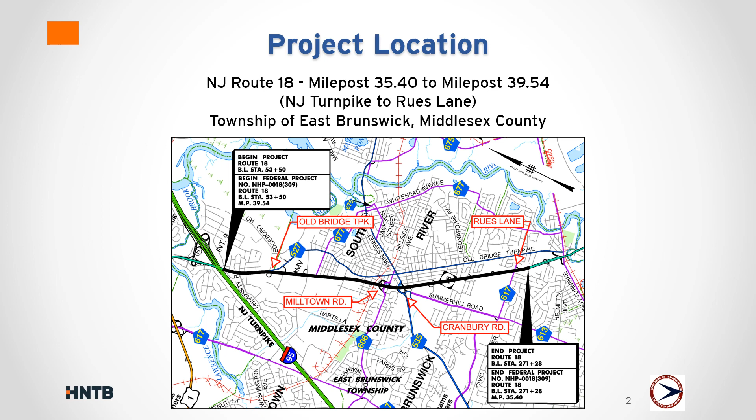This drainage and pavement project is located in the township of East Brunswick in Middlesex County, New Jersey. The project is approximately 4 miles long along Route 18. The northern limit is at the southern end of the Route 18 bridge over the New Jersey Turnpike, and the southern limit is just south of Rues Lane. In addition to Rues Lane, there are other major intersections and interchanges with county roads at Old Bridge Turnpike, Milltown Road, and Cranbury Road.

This project was initiated from being ranked highly on the NJDOT Pavement Management System and Drainage Management System lists. The purpose of this project is to provide pavement rehabilitation along Route 18 from milepost 35.40 to 39.54. Drainage improvements will be constructed to alleviate existing drainage deficiencies and flooding conditions.

Operational and safety improvements will be implemented to enhance vehicular and pedestrian safety and reduce congestion along Route 18 at Edgeboro Road and Tices Lane. Sidewalk and curb ramps, curb, guide rail, sidewalk connectivity, and traffic signal deficiencies will also be addressed.

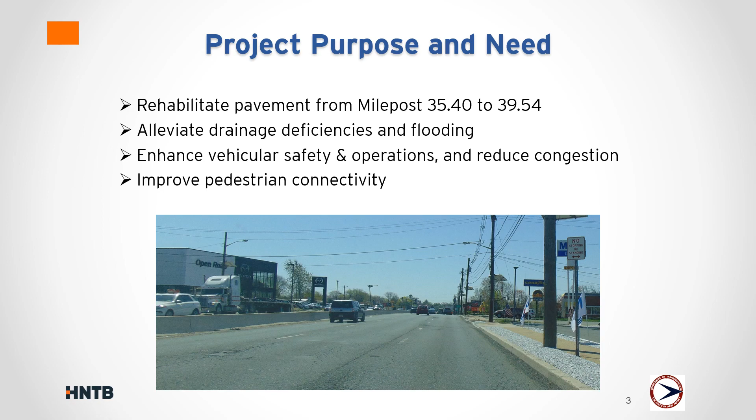Within project limits, Route 18 is a divided highway urban principal arterial with a 50 mph design speed and a 45 mph posted speed limit. The original shoulders were previously converted to a third lane in each direction, resulting in 3 lanes in each direction, but with no shoulders for shifting traffic during construction.

There are intermittent sidewalks along Route 18, but some segments are missing and some ramps do not comply with current standards. There are 8 existing signalized intersections that will be upgraded as part of the project and a 9th signalized intersection at Eggers Street and South Woodland Avenue that is in project limits but will not be affected.

East Brunswick is a commercially developed area with many access points along Route 18 and over 200 total driveways. Access to all properties will be maintained throughout construction, with all driveways remaining open during business hours.

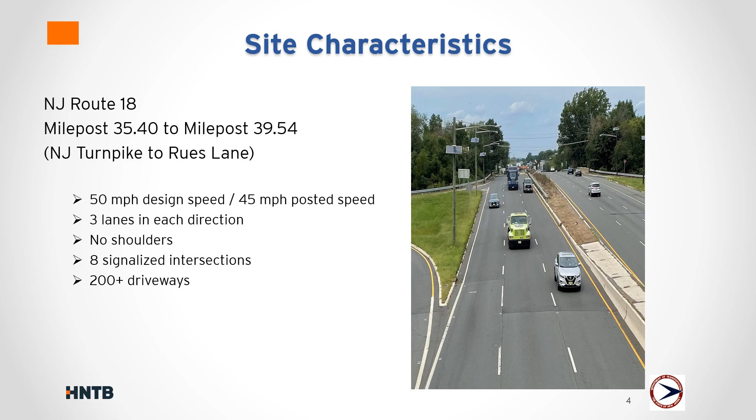The following 5 slides will show an overview of the proposed corridor improvements. The first slide starts at the north end of the project by the New Jersey Turnpike, progressing southward to Rues Lane and the south end of the project in the 5th slide. On each of the slides, you will see the roadway detailed in yellow and orange with blue boxes.

The yellow area represents the part of the roadway where pavement will be milled and resurfaced. The orange area represents the part of the roadway where the entire roadway will be replaced with new full-depth pavement. The blue boxes show each of the Route 18 traffic signals within the project limits.

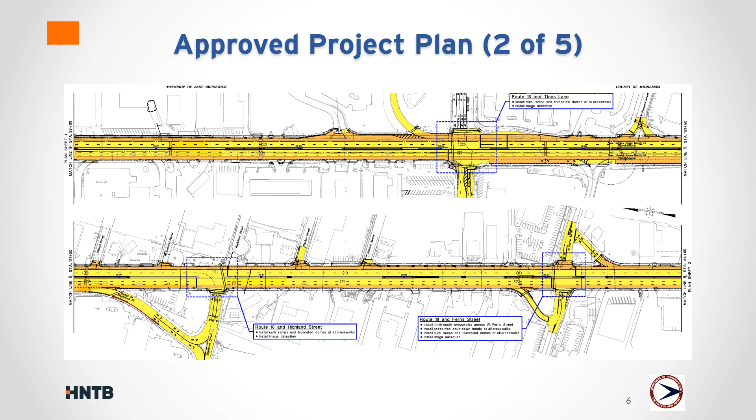On this next slide, you can see 3 blue boxes. These are at Tices Lane, Highland Street, and Ferris Street. There will be improvements to all 3 of these existing signals.

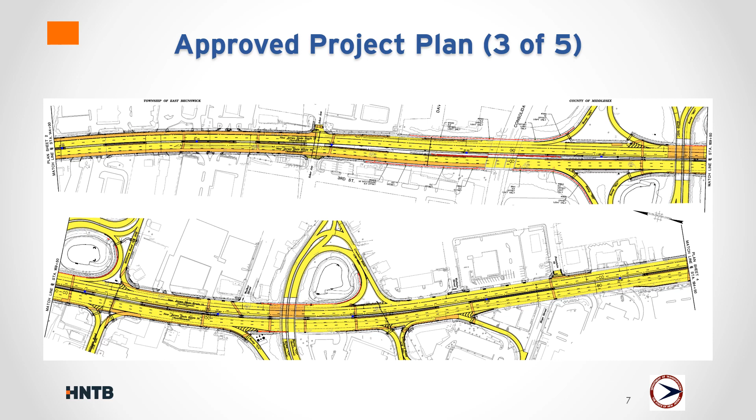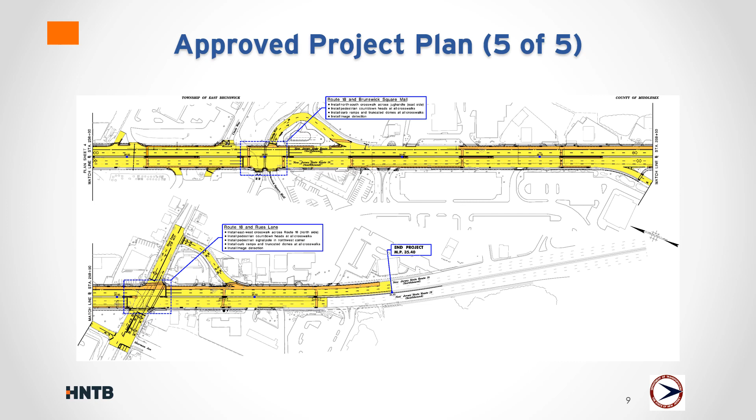Specific to roadway and traffic, the corridor improvements will include pavement, sidewalks, driveways, traffic signals, and related items. The right lane in each direction of Route 18, formerly a shoulder, will be reconstructed to provide proper pavement depth, cross-slope, and drainage improvements that will be discussed further on the next slide. The entire roadway will be milled and resurfaced along with intersecting streets, jug handles, and ramps. Guide rail will be upgraded to current NJDOT and federal MASH standards. Bus pullouts will be upgraded as shown here.

Missing sections of sidewalk will be completed to provide continuous sidewalk throughout the corridor, and all sidewalk and curb ramps will be designed to meet ADA compliance. Where feasible, driveways and parking will be adjusted or modified to provide the appropriate driveway width and spacing to meet the New Jersey State Highway Access Management Code, along with an ADA compliant sidewalk crossing.

Finally, new 12-inch signals will be provided to meet current NJDOT standards. These will be at the 8 intersections previously identified, starting at Old Bridge Turnpike and Edgeboro Road in the north, as shown here, and onward south to Rues Lane. All of these signals will be linked to the state's Adaptive Traffic Signal Network by ITS connectivity through the NJDOT fiber optic network. The state centrally monitors these signals and can adjust timings as needed to provide the best possible traffic operations, especially during periods of traffic congestion.

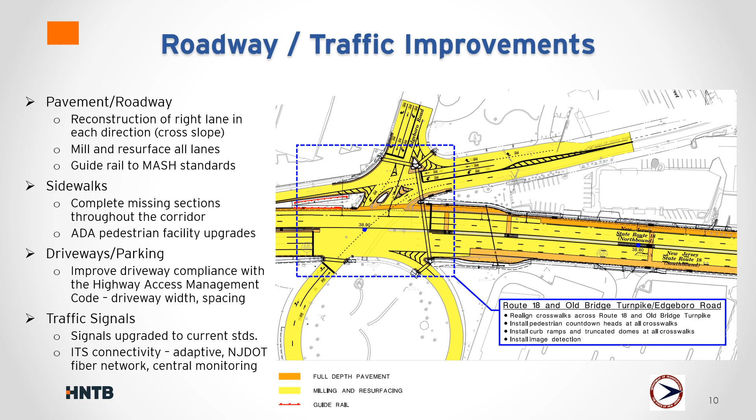The existing drainage system mainly consists of corrugated metal pipes. Corrugated metal pipes running longitudinally along the roadway will be removed and replaced with reinforced concrete pipes meeting current NJDOT standards, while lateral or transverse pipes crossing Route 18 will be filled and abandoned with a new reinforced concrete pipe placed next to the existing corrugated metal pipe. In addition to the pipe replacements, the project includes the installation and reconstruction of drainage inlets and manholes to improve gutter spreads and hydraulic grade lines, which will reduce flooding concerns along the highway.

In accordance with New Jersey Department of Environmental Protection requirements and the permits issued for this project, stormwater management treatment will be constructed as part of the project. The stormwater management design includes the construction of 2 new bioretention basins, reconstruction of 2 existing wet ponds, rehabilitation of an existing detention basin, and the installation of 3 water quality chambers.

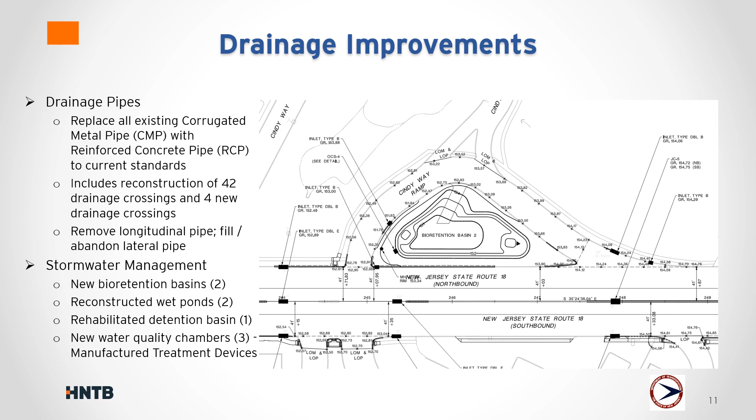The project received all the required NJDEP land resource protection permits in December of 2021. The permits included a flood hazard area individual permit, freshwater wetlands general permit number 11, water quality certificate, and a 5G3 construction stormwater permit. These permits authorize work in regulated areas such as freshwater wetlands, floodplains, and riparian zones.

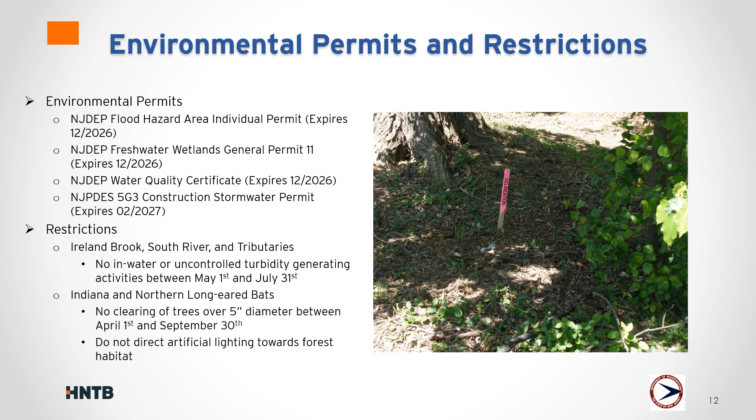The project has incorporated all the NJDEP's permit conditions into the contract plans and specifications. The permit conditions include restrictions on when and how work can be performed in and around environmentally sensitive areas, such as limiting turbidity generating activities near waterways and restricting when trees can be cleared to avoid impacts to threatened and endangered species.

Construction of some of the new drainage facilities, traffic signals, pavement upgrades, and other project elements will cause conflicts with existing aerial and underground utility facilities. Therefore, the project includes utility relocation work that will be performed by the state's contractor and various utility owners. Approximately 9 utility poles and the electric and telecommunications cables on them need to be relocated. Portions of an existing 24-inch gas main will need to be relocated to allow for new drainage construction. 6 new gas main segments totaling over 11,000 feet will be constructed.

Due to the advanced age and significant number of drainage conflicts with the existing water distribution system, most of the water mains within the project limits will be replaced, including all connections and services totaling over 24,000 feet. Also, due to new drainage installations, it will be necessary to relocate about 2,400 feet of existing Verizon duct banks.

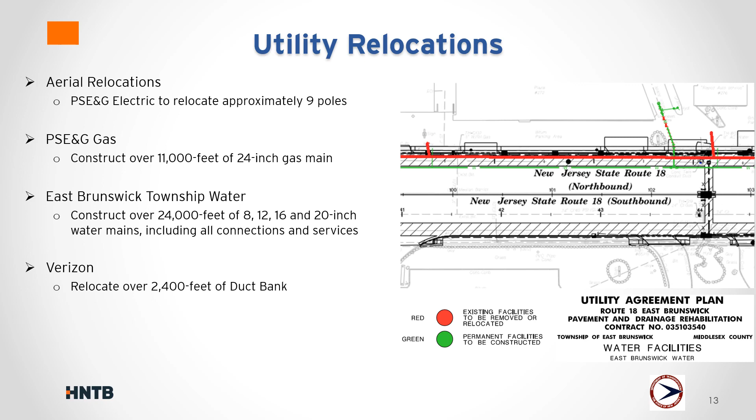The construction contract was awarded to Earl Asphalt Company in June 2022. Construction is scheduled to begin in September 2022 and will have an approximate 4-year construction duration. Substantial completion of construction is anticipated in summer 2026 with an anticipated final completion date in fall 2026.

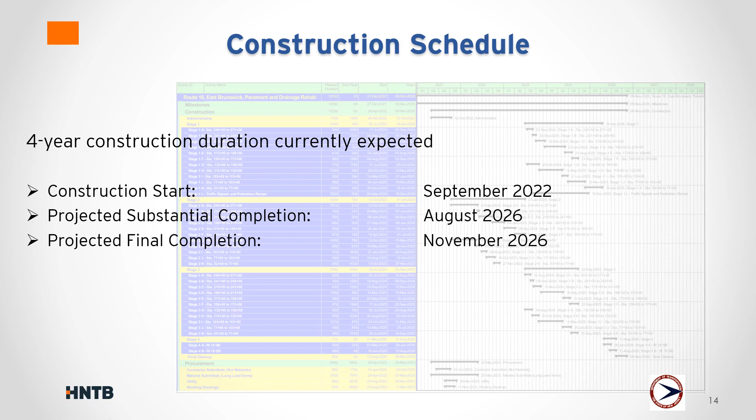The project staging is divided into 4 major stages in the traffic control plans as depicted on this slide and as further detailed in the slides to follow. Stage 2 center median work may begin ahead of stages 1 and 3 to avoid project delays while the required right-of-way is being obtained for property access along the southbound and northbound right lanes. Stage 1 northbound and Stage 3 southbound construction may be performed concurrently once access to the required properties is available.

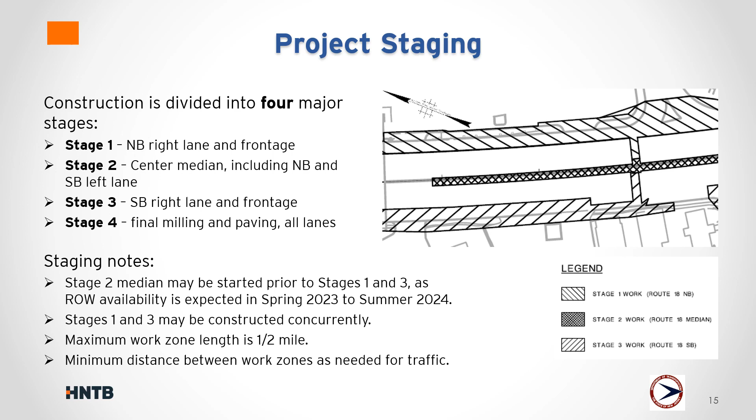To meet NJDOT maintenance of traffic standards, the maximum continuous work zone length will be 1/2 mile, with the associated lane closure only allowed to pass through one signalized intersection at a time. The distance between the successive work zones will be based on the necessary signs and sign spacing to help motorists navigate the corridor. The contractor may construct in multiple work zones simultaneously in each direction of Route 18, provided that each work zone meets these above criteria.

Stage 1 work will perform construction within the northbound right lane and along the roadway frontage using long-term lane closures behind traffic drums. Drums will be used for lane closures instead of construction barrier to help maintain driveway access within the work zones. During Stage 1, there will be longitudinal drainage and utility improvements, including installation of a new 12-inch water main along with underground lateral drainage crossings and utility connections. Pavement, curb, sidewalk, driveway, traffic signal, and guide rail improvements will also be constructed within the Stage 1 work areas.

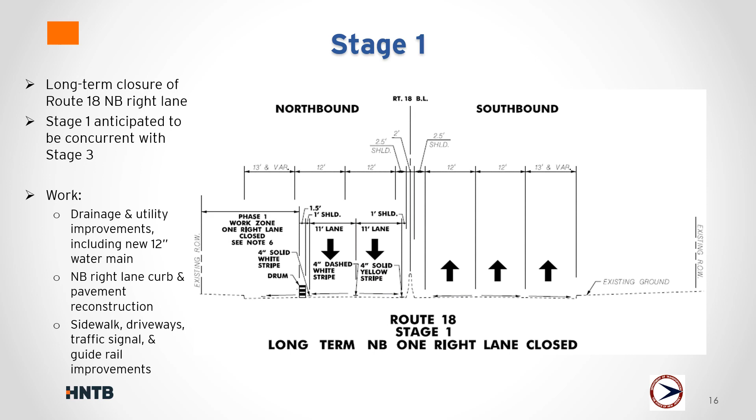Stage 2 work will perform construction within the Route 18 center median and the adjacent left lanes in each direction of traffic using long-term lane closures behind temporary concrete construction barrier. Construction barrier will be used to maximize work zone protection between opposing directions of traffic, with openings only at signalized intersections for cross-street traffic.

During Stage 2, there will be longitudinal drainage and utility improvements, including installation of a new 24-inch gas main replacing sections of the existing gas main, along with underground lateral drainage crossings. Pavement, curb, concrete barrier, and guide rail improvements will also be constructed in this area.

In order to construct the 6 segments of the new 24-inch gas main, up to 12 weekend-long closures of both the left and center southbound lanes will be needed to perform the tie-in work to the existing portions of the gas main to remain, with each closure accomplishing the tie-in at one end of each of the 6 segments. This traffic impact will be discussed further in this presentation.

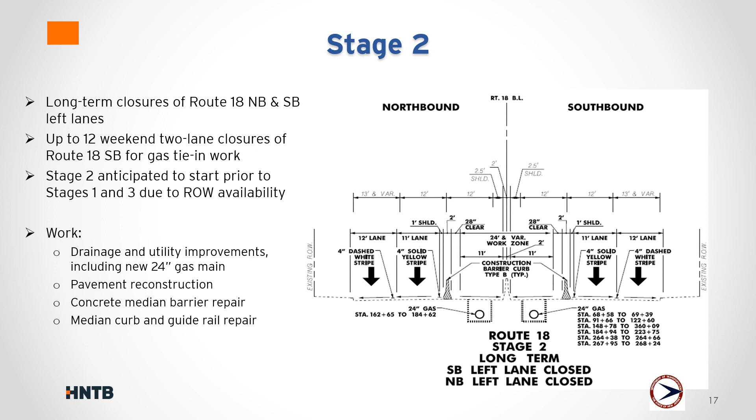Similar to Stage 1 work, Stage 3 will perform construction within the southbound right lane and along the roadway frontage using long-term lane closures behind traffic drums and not barrier. During Stage 3, there will be longitudinal drainage and utility improvements, including ITS conduit replacement along with underground lateral drainage crossings and utility connections. Pavement, curb, sidewalk, driveway, traffic signal, and guide rail improvements will also be constructed in this area. As noted previously, Stage 3 construction may be performed concurrently with Stage 1 since they occupy opposing sides of Route 18.

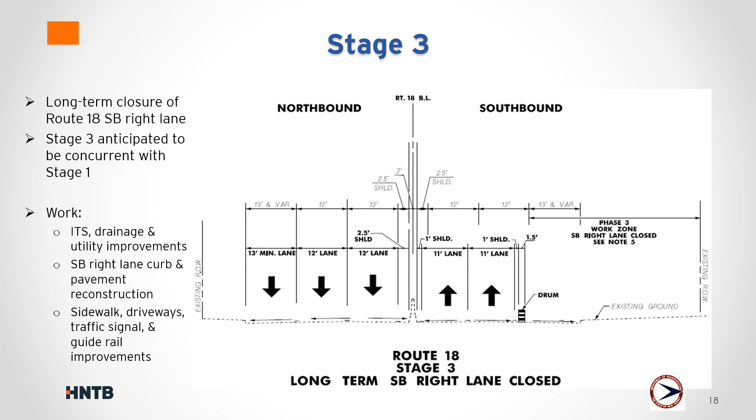Stage 4 work will follow all other construction within the contract. Final pavement resurfacing will be performed across all northbound and southbound lanes to the final roadway grade. All curb inlets previously installed to the height of the interim pavement conditions will be reset to meet the final roadway grade. Median inlets will be constructed to final grade in Stage 2 so that the median does not need to be reconstructed in Stage 4.

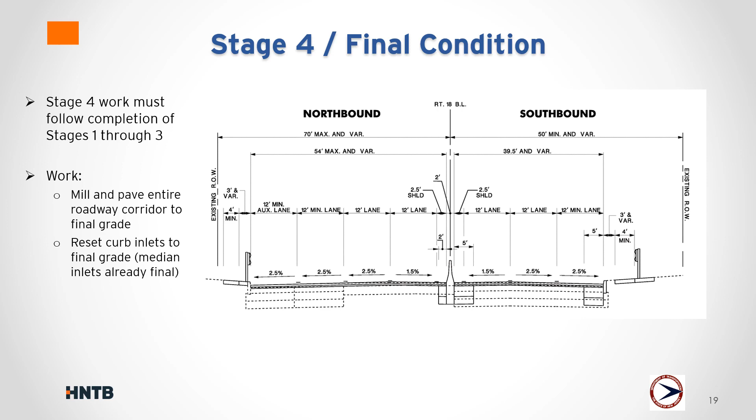During construction, overnight closures of streets and driveways will be used to advance work under Stages 1 and 3 along the right side of Route 18 in each direction. It is intended for all streets and driveways to be open during the day and peak hours. During the overnight, side streets will be reconstructed in halves so that there is access exiting Route 18 into the street and a detour for the side street traffic to get to Route 18 at the next access point. No 2 consecutive side streets are to be closed at the same time.

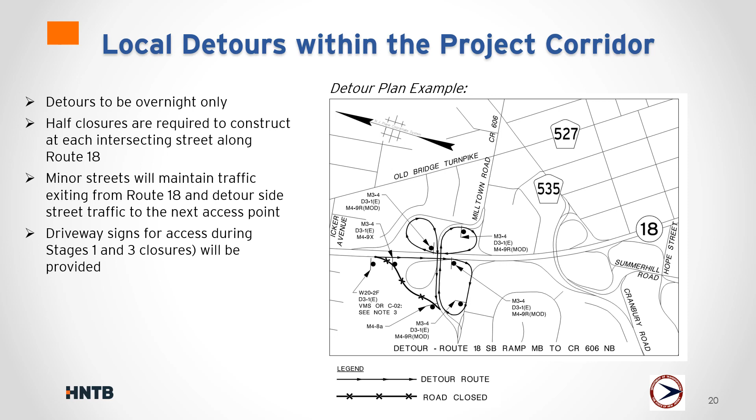As stated previously, Stages 1, 2, and 3 will all feature long-term lane closures in the work areas under each stage. Stage 1 will close the northbound right lane, Stage 2 will close the northbound and southbound left lanes, and Stage 3 will close the southbound right lane. 2 lanes may be closed during overnight periods to help with certain construction features such as lateral drainage and utility crossings.

However, as noted under Stage 2, there will be up to 12 weekend-long closures of both the left and center southbound lanes to perform the tie-in work for 6 segments of new 24-inch gas main, with the new gas main in the left lane tying into the existing gas main in the center lane. The gas tie-in work will only be allowed between the months of April and October, avoiding colder months with higher gas usage and any weekends with major events that may add to Route 18 traffic.

Understanding the 2-lane closures is a significant traffic impact, NJDOT will work with the construction contractor and any other affected traffic agencies and project stakeholders to coordinate this effort, provide appropriate traffic safety or mitigation measures, and provide information to motorists and the general public. Adaptive traffic signal timings will be monitored and modified if needed to provide the best possible traffic flow during these times along both Route 18 and the intersecting streets.

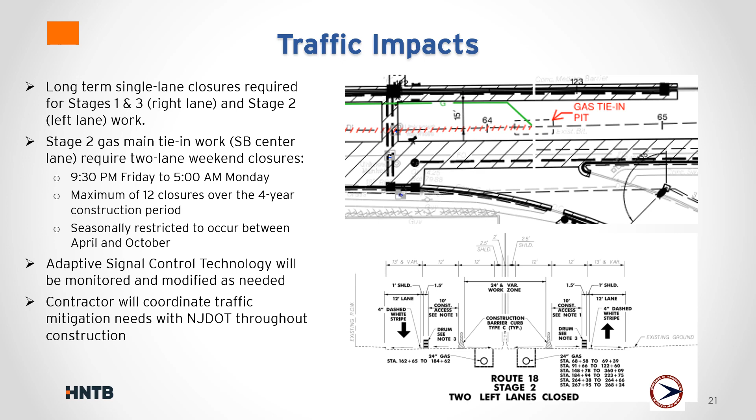Thank you for participating in the Virtual Public Information Center for the Route 18 East Brunswick Drainage and Pavement Rehabilitation Project. Questions and comments can be submitted through this website or by mail or email to Meredith Hammond, NJDOT Office of Community Relations, P.O. Box 600, Trenton, New Jersey 08625, or meredith.hammond@dot.nj.gov. Questions and comments will be accepted from September 26, 2022 through October 10, 2022.